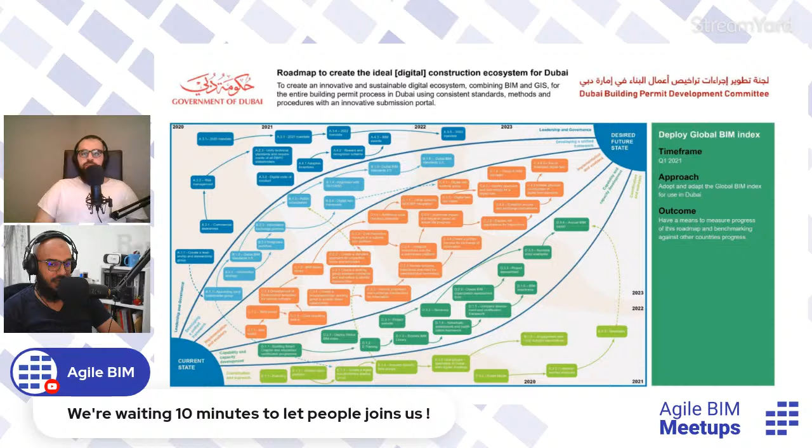In Dubai since 2013, there is a circular which mentions clearly that BIM was mandatory since 2013 in some specific projects, like buildings of 40 typical floors and more, and for buildings of more than 300,000 square feet.

And for specialized projects like hospitals, universities, airports, and projects done by foreign consultants, all these projects should be designed using what we call building information modeling. And this is since 2013, from circular 196. Since that time, the people in Dubai Municipality did a great job.

They made a big effort and started working on an amazing roadmap to make people more aware of this amazing technology. And in the middle of 2021, they launched what we call the BIM standard. It's a guide for implementing BIM for building permit applications, a guidance for what we call the BIM platform to get the building permit.

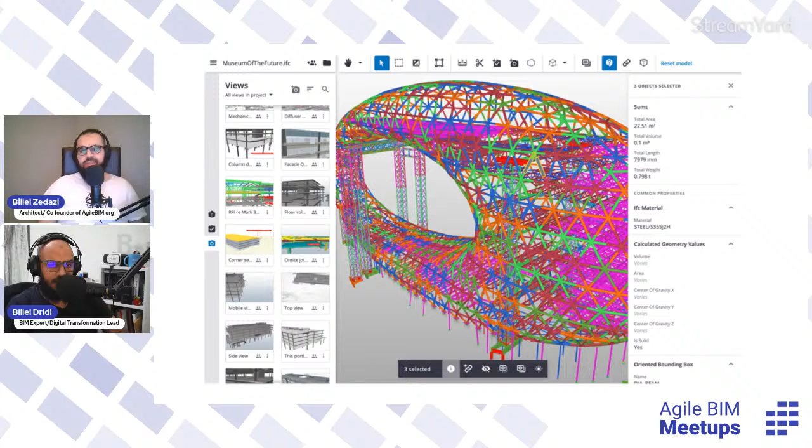Yeah, thank you. Okay, so maybe you want to show us one of your projects? Yes, in FAM Holding, which is one of the places where I'm working as the manager and digital transformation lead.

So yes, Bulk Architects, he said they've used 3D Max. To be honest with you, Bulk, I don't know, but yes, maybe.

In FAM Holding, as one of the real estate developers in UAE, by the way, we are the first real estate developer and the second in the Middle East who got the prestigious kite mark from the British Standard Institution, the BSI, ISO 19650 Part 1 and Part 2.

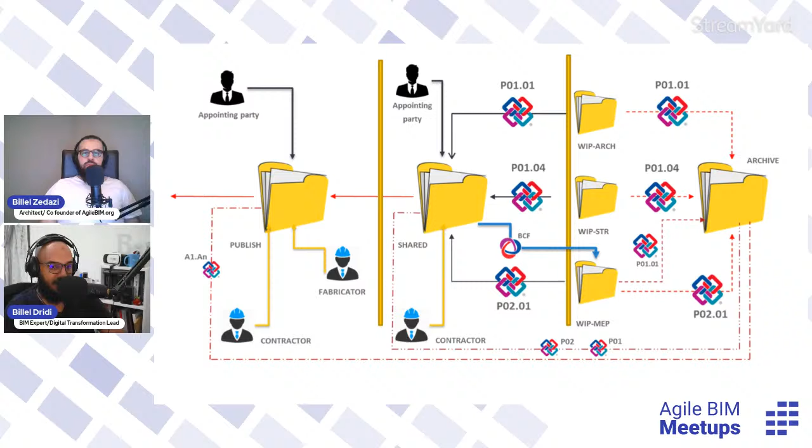So one of the projects which we used during the time we started thinking seriously to implement or adopt this technology. This is one of the workflows, and we are adopting ISO 19650, especially in the information exchange in our common data environment, which is like the work in progress, shared, published, and archived. I will not go through this one because we need a lot of time to explain the information exchange, so I will jump directly to our project.

This is one of our projects called the Snow Tower. Usually in our company, we are creating projects which are not just a project or a high box with flats with small boxes inside. Usually we link our project with a unique idea, so it's called Snow Tower.

Why? Because in the last level, or in the roof here, there is a snow garden where we've called specialists from Italy. These specialists have machines which produce artificial snow. So the people who are living here, or even people from outside, can go and enjoy the artificial snow. That's why we call it the Snow Tower.

And this idea has been - sorry, is it in Ajman or in Dubai? In Sharjah, yes, it's in Sharjah actually. So this is the highest.

So we'll not talk about the part of sustainability, because in some countries of the world, in Europe, snow in the desert is not something all people agree with. It's not up for debate here, but this is possible in Dubai, in UAE by the way. So people here, if you want to do something, you can do it. This is going to be the highest building in Sharjah - with this crown, it's going to be the highest one.

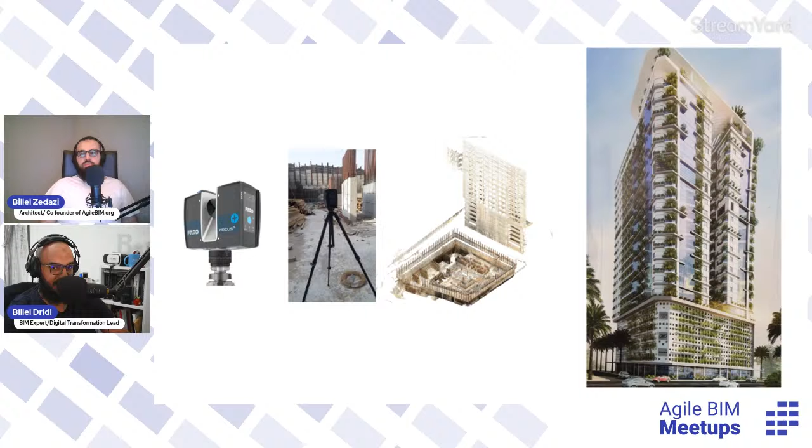And the point here I have to mention, this is an IFC extension or model. The point, or negative point, is that every time you change or send your comments on the IFC model, the people have to export it again under a new IFC with a new revision, and send it back to you. In some platforms you can compare the old version with the new one, but in some there is no similar option.

But anyway, I have a question: did you use some BCF for the issues? Yes. To be honest, in Trimble Connect there is another name for BCF, it's called To Do. But they've launched the BCF as beta in the last 3 months to replace the To Do, because people don't know something called To Do, so it's confusing for people used to the BCF format. So they launched the BCF, and To Do still exists there, to make people familiar with BCF, then they will cancel To Do and officially activate BCF. But it's similar to BCF, so you can export as a BCF and fix the issue in Revit or whatever, in ArchiCAD, in the authoring tool.

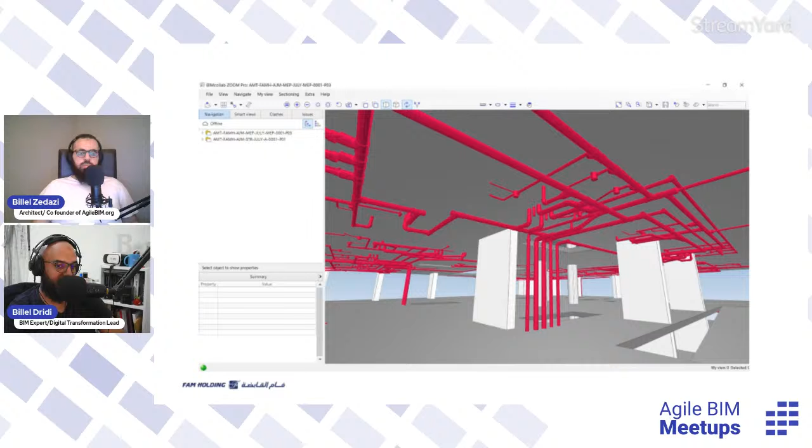I mean the IFC, is it well mapped or not, to see the properties, the doors. For example, is the door fire rated or non-fire rated? Because we have to respect that during the modeling. So the information which we are inserting in the BIM model has to be like our guidance. It's the specification, the client requirements and the local regulations, and based on that you have to take it as guidance, plus the IFC mapping which exists in buildingSMART. Based on that you create your BIM model, and you can use this option for BIM model checking and validation using BIM Collab and BIM Collab Zoom.

Yeah, this is one of the same project. So you can see here the drainage model.

It's always done with the team, internal team, or for this project, the architectural and structural work has been done internally, but the MEP stuff was outsourced, so we've used some people from outside.

And the communication, of course, has been done using Trimble Connect as the official platform. So yes, we have some questions.

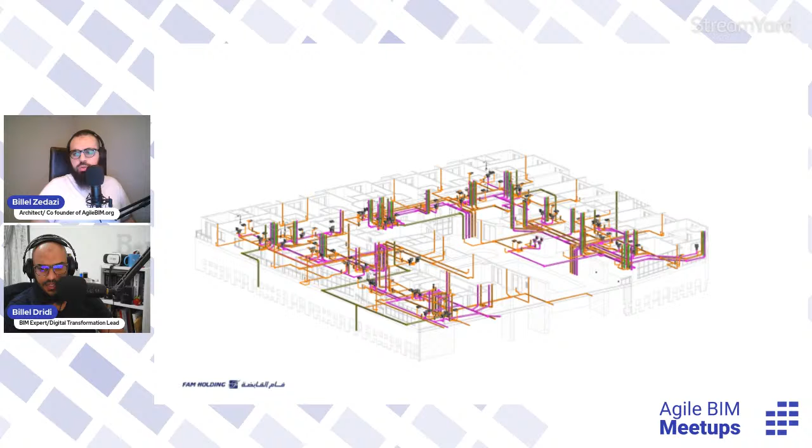I think, do you prefer to wait, or maybe can we ask? We have some questions. So, do you prefer to? Yeah, so we have one question from Mauricio Galan.

The question is, which software are you planning to use to manage the OM phase? What do you mean by the OM phase? Operation management. Yes, with which software are you planning to manage? Yeah, so it's about facility management, right?

Mauricio Galan, yeah, this is a very good question. Actually there is a lot happening in the operation phase. There are a lot of softwares like Ecodomus, maybe Dalux. You can use them in the operation phase.

But to be honest with you, I'm talking about our company, we are in the early stages of BIM implementation. So our strategy was to go slowly, and we didn't have the mindset to spend a lot of money on softwares or technology. So we do like risk assessment. But Trimble Connect, you can use as a start, as an operation and maintenance platform.

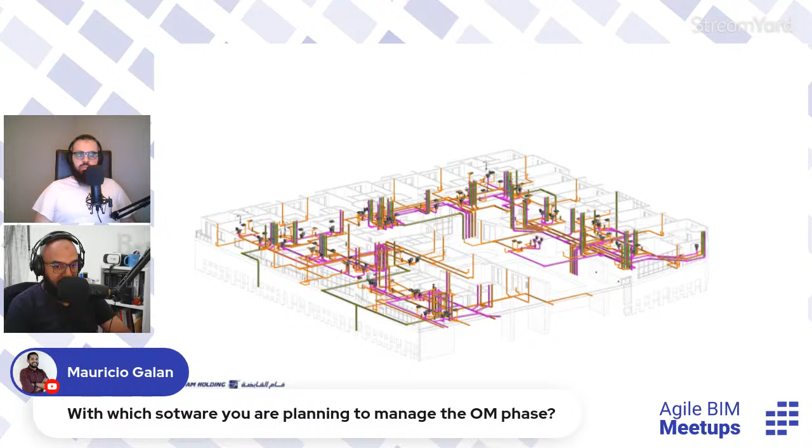You can ask how. Yeah, there is an option in Trimble Connect. If I go back to this one, you'll see small documents here. These documents, actually our strategy was to add the procurement department into the Trimble Connect platform as a common data environment.

So once the procurement department finalizes and signs with, let's say, the subcontractor or subconsultants, for the lift as an example, one of the conditions is if we are going to use Toshiba or Mitsubishi as the lift brand, this subcontractor has to provide a technical data sheet, which I'm going to use later during the operation phase or maintenance.

I have the option to link this technical data sheet in my information model or BIM model inside Trimble Connect, like you see here. Later, during the handover, I can get the information model full of technical data sheets. This is very basic compared to other amazing platforms like Ecodomus, but this is actually what we are doing.

But if you are asking about other platforms, of course there are a lot of platforms which you can use in the operation and maintenance phase. I don't know if this makes sense for you, Mr. Mauricio, but this is the case for us. Thank you, Mauricio, for your question.

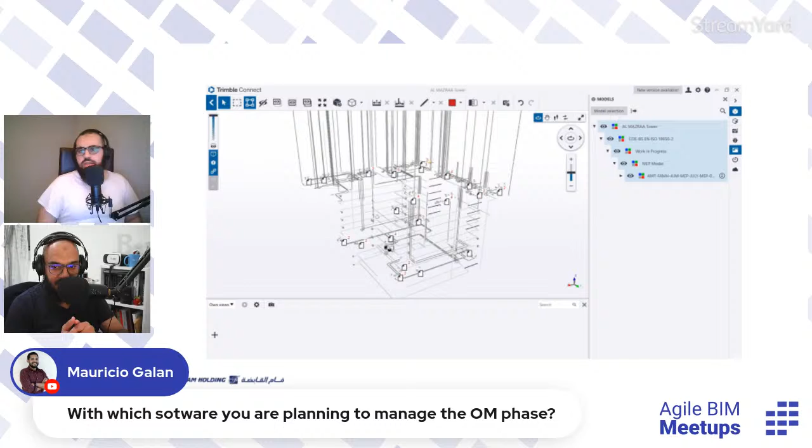Yes, there's a second question from Francois. Can you tell us more about? No, before that, there is a question from Bulk Architects.

As an architect, can we use SolidWorks or CATIA instead of Revit, because they can generate more complex geometry with proper documentation?

Go ahead. Yeah, for sure. We can answer to architect. So I will answer. Yeah, sure.

See what Gehry Architects is doing. They use CATIA, which is a software from Dassault from France. So yeah, you can use SolidWorks. I don't know, I think it's more for engineering work. To be honest, I don't know. CATIA also inside of Revit. Yeah, but CATIA, I don't know.

Yes, but Revit for complicated and organic forms, I believe Revit is not that much advanced. Yeah, so yes, sure, complex geometry. Yes, you're right. But SolidWorks can do the work better than Revit, obviously. I think it's all related to the question of generative design with Rhino, with

Grasshopper. There is Maya also. I think that at Zaha, the architects, they use Maya too. So I think it's a big question too. But yeah, I think you can use CATIA. SolidWorks, I don't know.

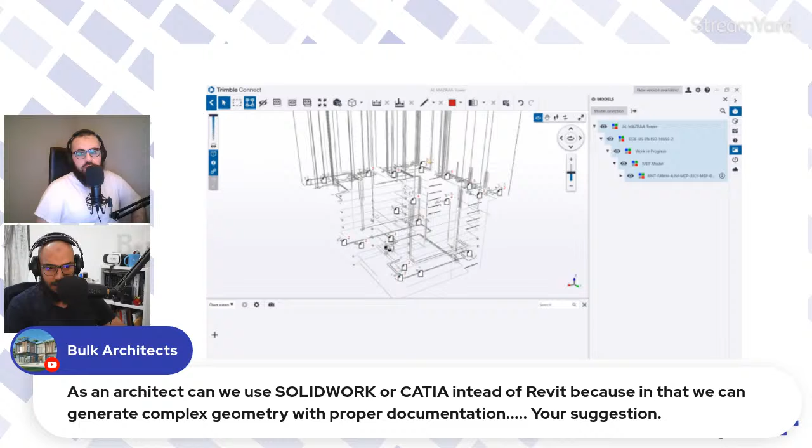Yes. Next question from François. Can you tell us more about Lean or Agile implementation on this project? What are the benefits? Yeah. We are not using Lean in the construction or the design, or Agile yet, to be honest with you, but we are planning for the next projects to do what we call takt planning.

Why? Takt planning is a part of Lean management. I don't know if you are familiar with this one, but as a real estate developer, with this project called the Al Mazraa Tower, I have like 601 flats, so I have to deliver. Some people prefer to deliver floor by floor. I finish the first floor, then I close it, I jump to the second floor. Some people prefer to deliver unit by unit, right?

So after, let's say, every month or every 2 months, instead of 601 flats on the waiting list, every 2 months you'll find you have like 550 flats waiting, and the 50 flats are closed already, done, finished, and everything fine with these flats.

So takt planning has the same principles as Lean management. You finish this task or this milestone, then you jump to the next milestone with no overload, with no extra labor, with no extra activities, something similar. But we are planning to use takt planning.

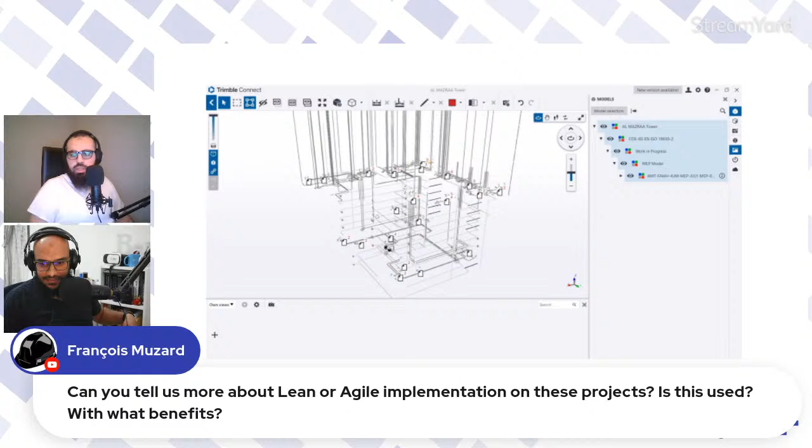So there is a next question, and after that I think we will finish the presentation and answer the last questions. Thank you, all of you. I'm very happy that there are a lot of questions. Yes. You have another question from Mauricio Galan.

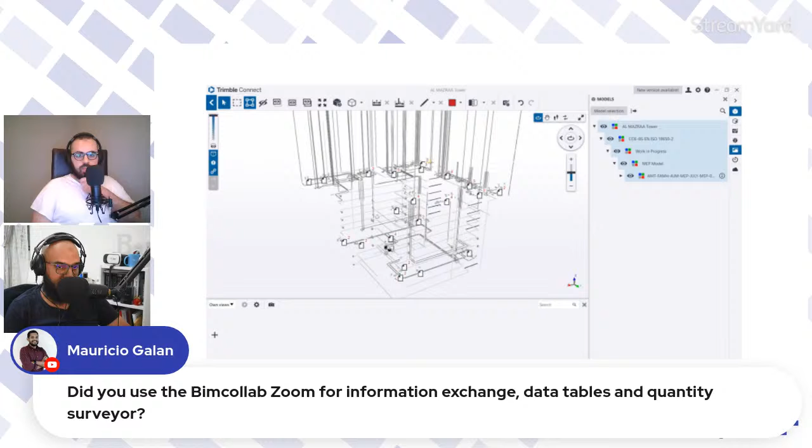Did you use BIMcollab Zoom for information exchanges? No, Mauricio. To be honest with you, we used BIMcollab only the first year. We used only the smart views and some clash detection exercises, and that's it. We bought it for 1 year, and we didn't renew BIMcollab Zoom.

Thank you, Mauricio, for the question. So maybe we can move on with the presentation, and we will answer.

Yes. So as I've mentioned, there are 5 steps in general for successful digital transformation, and we follow the same. You have to choose, of course, the digital-savvy leader in place. You have to level up your workforce capabilities. The most important point is you have to change the mindset and have the right tools. This is what we discussed earlier.

You have to be careful about the platform you are using. The point is, no need to go with a lot of features and options for nothing. If you need only clash detection and some other stuff like quantity takeoff, no need to buy a very expensive platform where you are going to use only 5% of it, and this gives very bad feedback to top management.

So it's like we are spending money for nothing. So yes, we have to choose the right tools to do a successful digital transformation or BIM implementation. Just a minute, Bilal. The fifth one: making both traditional and digital communication methods work in your favor. Why traditional and digital?

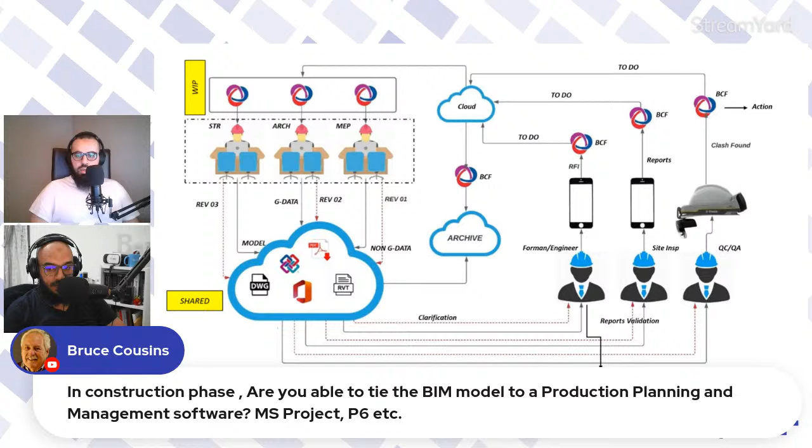So if you have any question in the chat, don't be shy. You can ask us. Why shouldn't they be shy? They have to be shy. No. So we have a question from Leo Babu.

I think, sorry if I didn't spell your name right. "Hello, can you explain how the project progresses after the detailed design stage?" Project Leo Babu, thanks so much for your question. I will answer if I understand, but I will tell you the workflow, how it's going on.

See, once I get the detailed design, I have to send it to the authorities for approval, right? So if you project this onto ISO 19650, it's like you are putting your output in what we call the published state, right? Published means it's done, approved by all parties. So here, this is a very critical point. You have to deal with the constructor or the contractor in an environment called a single source of truth. You have to work together in a common data environment.

So in this case, you'll be able to share, to communicate, as I've mentioned, to flow, to, let's say, track all the activities related to your project. So I believe you are asking about the linking point between the design and the construction, and even during the construction until we hand over the project. So here, you open another problem, Mr. Leo. I have to mention this one.

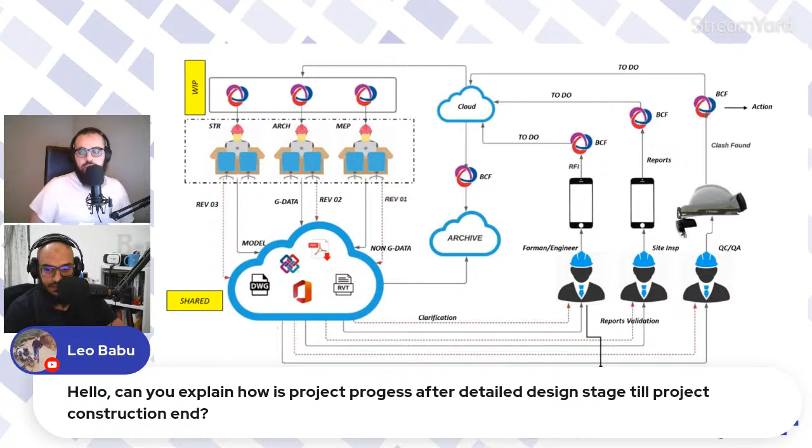Nice. Makes sense. Thank you for your question. Yeah. Okay. I hope. Tell us if not. We have a comment from Bruce. Yes.

If you are contemplating takt planning, you should look at LCM Digital.